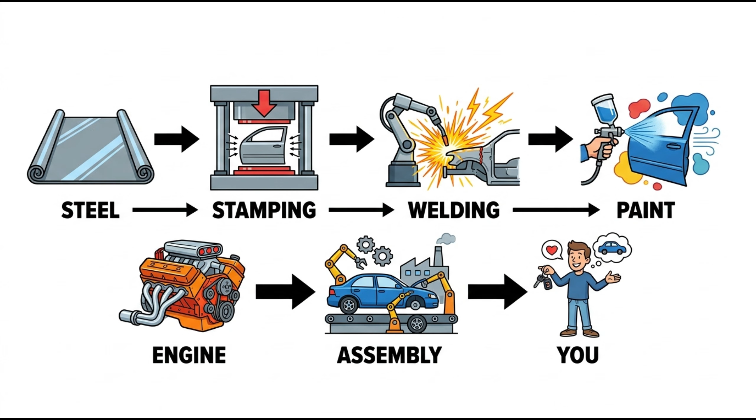Nobody shows you this part. Before we go inside the factory, you need to know one name. Mannheim, Germany. A man named Karl Benz is alone in a shed. No funding, no team, just an obsession.

He built a 3-wheeled carriage powered by a gasoline engine, the world's first true automobile. His neighbors called it the devil's carriage. His investors called it a waste of money. His wife Bertha said nothing. She just waited. August 5th...

1888, while Karl slept, Bertha took the car, alone, with their 2 sons. No map, no gas stations, no roads designed for cars. She drove 66 miles to her mother's house. When the fuel ran out, she stopped at a pharmacy and bought Ligroin, a cleaning solvent that worked as fuel. When the brakes wore out, she wrapped her leather shoe around the brake block.

She invented brake pads. On the road that day, newspapers covered it. The world saw the car wasn't just a toy. It worked. That pharmacy still exists today, as a museum, because one woman's drive changed everything.

But mass production, that came from someone else entirely. Henry Ford, 1913, Detroit, Michigan. He didn't invent the car, he invented how to build millions of them. Ford's moving assembly line: workers stay still, the car moves to them. Simple idea, revolutionary result. Before, one car took 12 hours and 28 minutes to build.

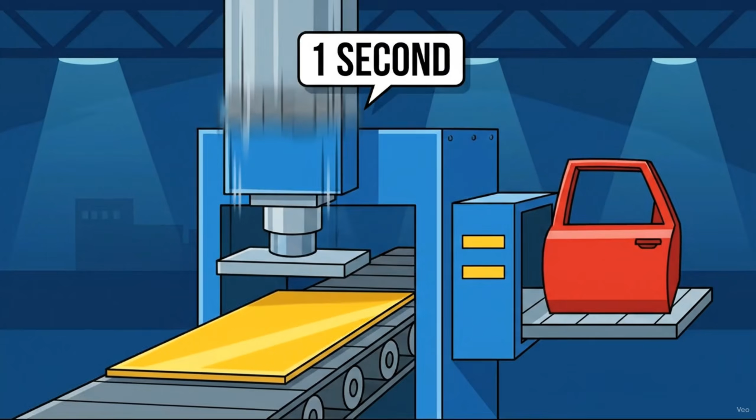After Ford's line, 93 minutes. Same car, same workers, different system. He cut the price from $850 to $260 in just 8 years. Workers could afford what they built. By 1918, half of all cars in America were Model T Fords. One design, millions of copies.

Fast forward 110 years, the factory looks nothing like Ford's, but the logic is the same. A modern car has over 30,000 individual parts, coming from 800 suppliers across 40 countries. And it all starts with one thing: steel.

Step 1. Stamping. Steel arrives at the factory in giant coils. Each one weighs 30 tons. That coil gets unrolled and fed into a stamping press. This machine weighs 500 tons. In 1 second, 500 tons of pressure transforms flat steel into a car door.

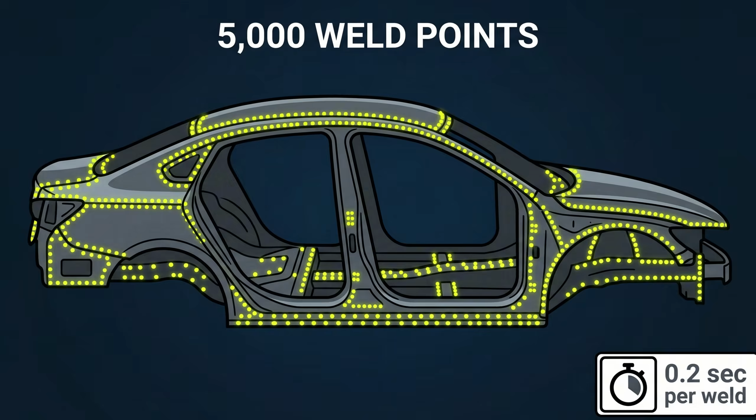1 second. Roofs, hoods, fenders, floors, all stamped from flat steel, about 6 seconds each. One stamping plant runs 24 hours a day. It produces 400 parts per hour, every hour. The leftover steel scraps are collected, melted, reused. 0 waste.

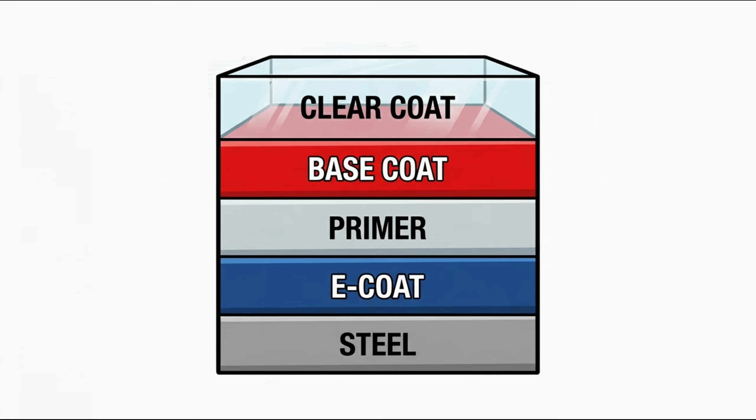Step 2. The body shop, where the skeleton is built. The moment the parts arrive, 500 robots wake up. All at once, they weld 5,000 individual points on every car body. Each weld takes 0.2 seconds. A human welder needs 3 minutes per joint. A robot, 0.2 seconds. And it never makes a mistake, but robots still can't do everything.

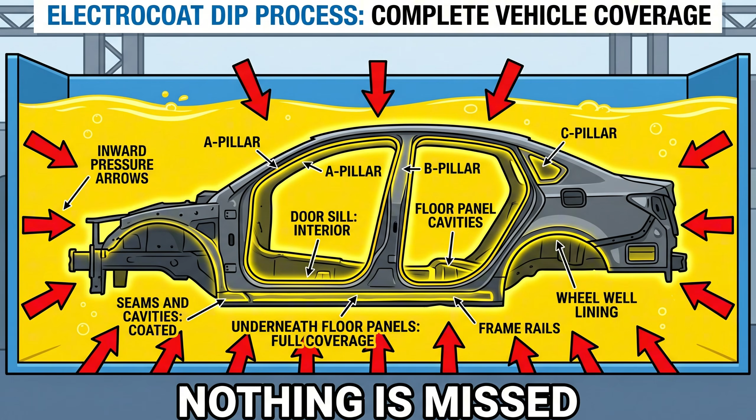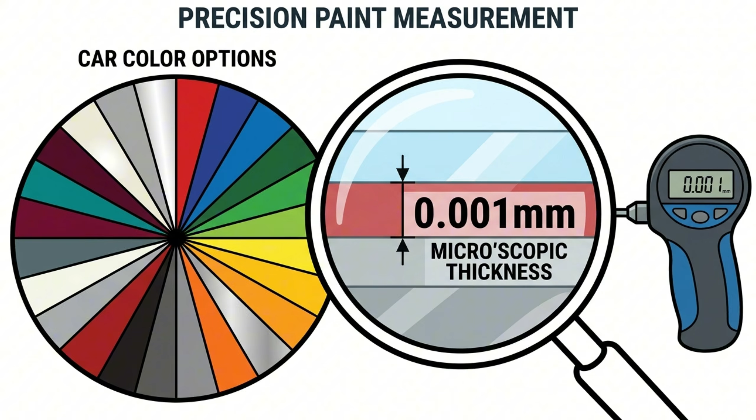Humans handle the tightest corners, the most complex angles. After welding, a laser scanner checks every millimeter of the body, 500 measurement points, in 45 seconds. If even 1 point is off by 0.5 millimeters, the car is pulled from the line. At the end of this stage, what was flat steel now looks like a car. Unpainted, raw, real.

Then primer, baked at 180 degrees Celsius for 30 minutes. Then the base coat, your actual color, applied by robots in an enclosed chamber, that color you chose from a brochure, mixed to a thickness of exactly 0.001 millimeters. Finally, clear coat, the glossy protective layer on top, baked again. Total paint time: 8 hours.

The paint shop is the most energy-hungry part of the entire factory. It uses 70% of all electricity.

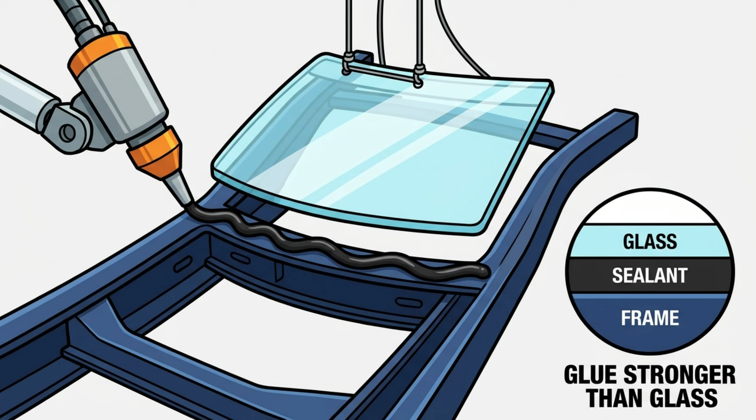Step 4, general assembly, the beating heart of the entire operation. The line never stops. It moves at exactly 6 centimeters per second, 24 hours a day. Each worker has exactly 60 seconds to complete their task, then walks back and does it again, all day. If you miss your 60 seconds, you pull a cord above your station. The line stops, everyone knows. Toyota calls this the andon cord.

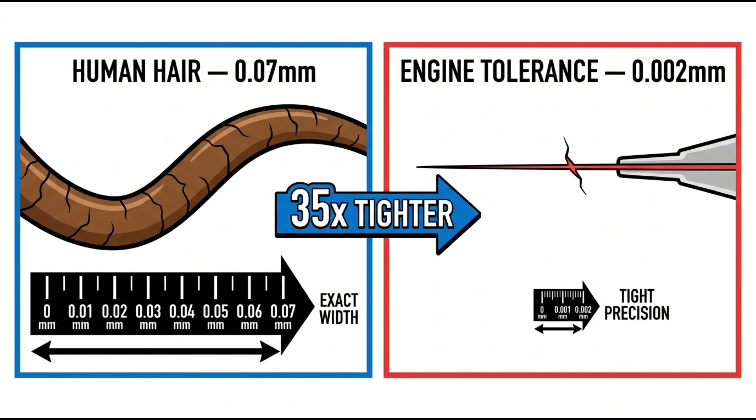It has been in use since 1965, and it is still the most powerful quality tool in manufacturing. First into the car, the dashboard, then 5 kilometers of electrical wiring. Think about that, 5 kilometers of wire folded into your car. If you laid it out, it would stretch across a small city.

Then the engine drops in from above. This moment has a name inside every factory in the world. They call it the marriage. Body meets engine. From this second, the car is alive.

Then glass. Windshields are glued in, not bolted. The glue is stronger than the glass itself. Then seats, then wheels, then doors, hung back on at the very end. Wait, doors were removed at the start and hung back at the end? Yes, it is easier to work inside a car without doors.

By the time the car reaches the end of the line, over 2,000 pairs of hands have touched it.

But where does the engine actually come from? Because it doesn't just appear. Engines are built in completely separate factories, sometimes in a different country entirely.

Inside an engine plant, tolerances are insane. Parts must fit within 0.002 millimeters. That is thinner than a human hair, a human hair is 0.07 millimeters. Engine tolerances are 35 times tighter than that. One engine has over 200 moving parts, every single one machined to that precision.

Before any engine leaves the plant, it runs for 20 minutes on a test bench. Full throttle, emergency stop, cold start. If the engine passes, it gets shipped immediately, just-in-time delivery. It arrives at the assembly plant exactly when needed.

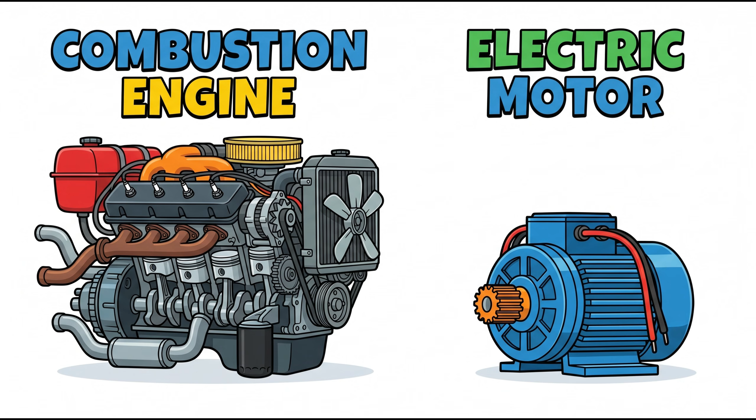Step 6, quality control, and this is where the stakes get very high. Every finished car enters a light tunnel, a room lined with 4,000 LED lights. Those lights reveal any paint defect larger than 0.1 millimeters, a scratch you'd never see in daylight, visible here.

Then, the water test. 3,000 liters of water poured over the car for 4 straight minutes. Inspectors sit inside while the water runs. If they feel one drop, the car goes back.

Then, the road test. Not a sample, every single car drives 7 kilometers on the factory test track. Cobblestones, steep hills, emergency braking from 60 miles per hour, all inside the factory grounds. If it passes everything, a green tag goes on the mirror. It's ready for the world.

Now the numbers, because the scale of this industry breaks your brain. In 2023, the world produced 93.5 million cars. That's one new car every 0.34 seconds. Right now, as you watch this, Toyota alone builds one car every 6 seconds across its global network of 67 factories.

The largest auto factory on Earth, Volkswagen Wolfsburg. It covers 6.5 square kilometers, 14,000 people work there every single day. 3,800 cars leave that facility every single day. That factory has its own power station, its own railway, its own post office, its own fire department. It is not a factory, it is a city that makes cars.

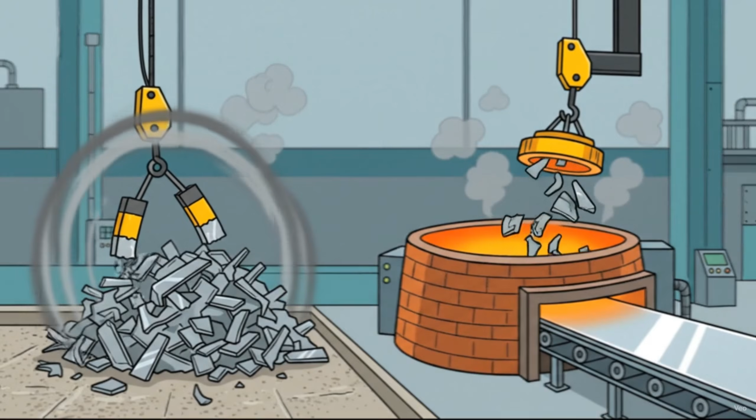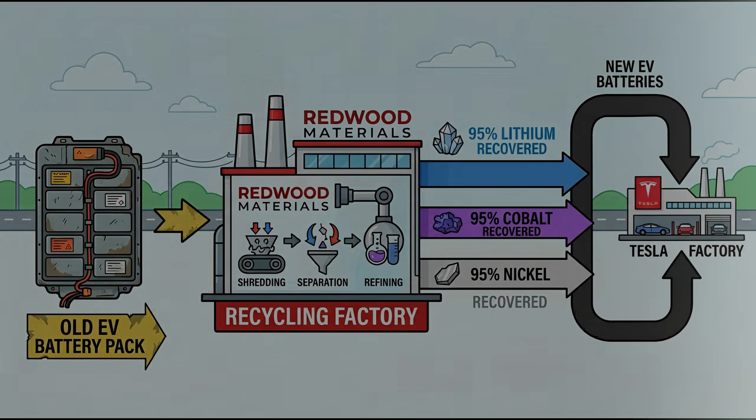So here is what you now know that most people don't. Your car didn't start in a factory. It started with a woman in a Victorian dress who fixed the brakes with her shoe. 2,000 workers, 800 suppliers, 40 countries, 30,000 parts, 17 hours, all for one car. The steel in your car has probably been something else before, and one day it'll be something new again.

The next time you sit in your car, you may not just be sitting in metal and plastic, you may be sitting in 140 years of human obsession.